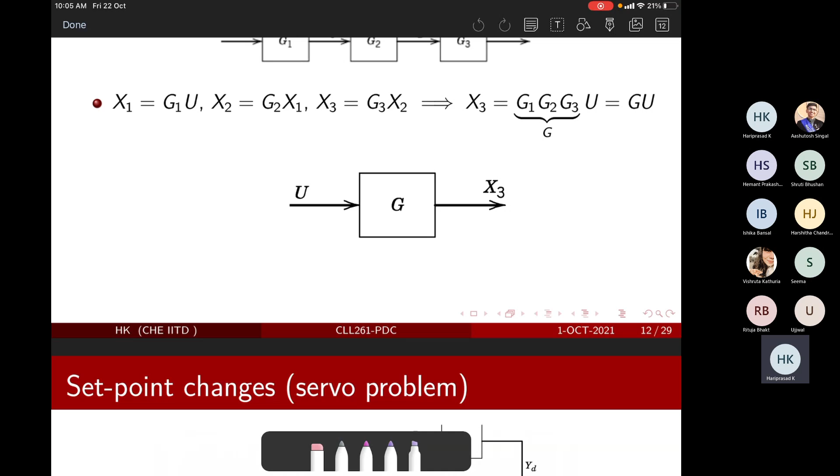Okay. Let me check. Okay.

Okay guys, let's restart or do a memorizing exercise. Where were you? Sorry, this is my kids' business. Let me close this down.

Okay, so we were trying to understand the closed loop control system with complete components, which means everything. So if you look at the architecture, it contains various components, starting from here. Give me a minute.

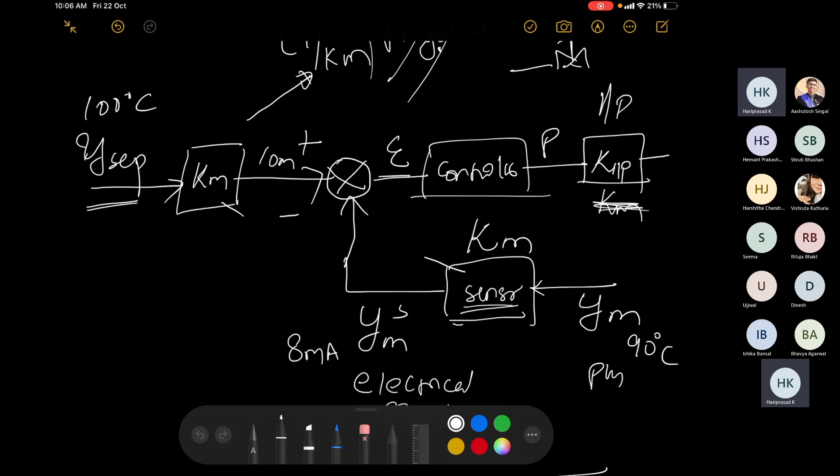So it starts with a set point. You have to have a conversion mechanism to take the set point inside. This is YSP, the original YSP. Then you need a converter, which is equivalent to mostly the measurement conversion.

So this would now go into YSP tilde, which is the set point in terms of signal. So this is the physical variable, and this is the signal equivalent. My goodness, this guy is making an issue.

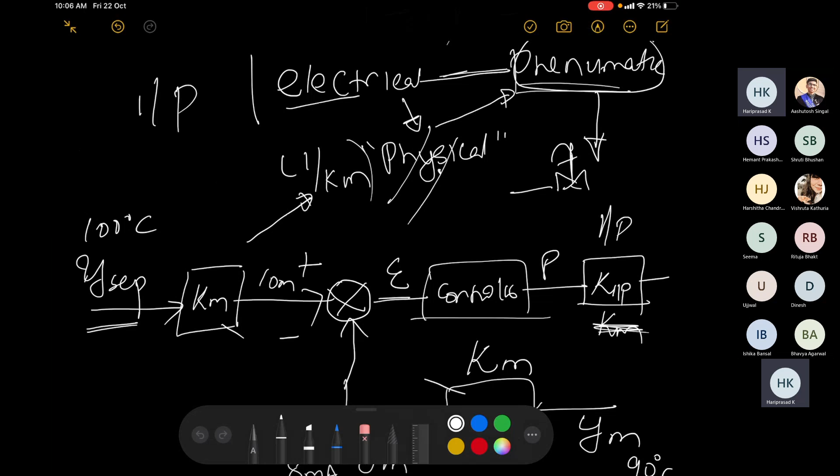So let me use this to explain that. This is the signal equivalent, and that is going to the comparator, where you get the measurements and calculate the error. That error, in terms of the signal, is going into the controller.

The controller would send it to I2P. From I2P, I think we have a very detailed comparison. I2P means I for current, P for pressure. So it's a current to pressure converter, or current to pressure transducer.

Then that is connected to the control valve, and the control valve connects back to the process. So this is the overall mechanism. Our concern was, we are basically looking for a process, and we know we need to control the process at a certain set point.

The key interest comes in the process term, and the controller term, because you have to control the process. The rest are added based on the needs, because the controller requires measurement, so you need to add a sensor. The controller will only take error in terms of signal, so you add a signal converter followed by a comparator. Then the real controller stays as it is.

Then the controller gives you an output, so you convert it back into a pneumatic variable, because your final change is affected through a control valve, or any actuator. So just for controlling the system, you have added up and bulked up the entire system in a slightly larger fashion.

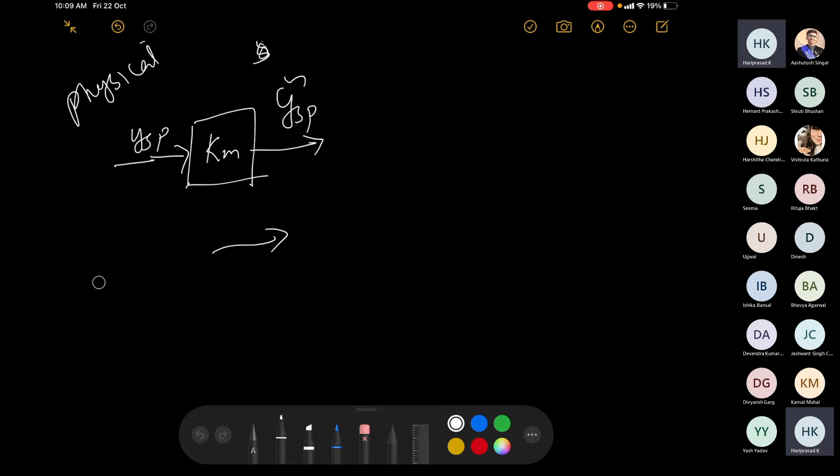So your aim is just to control, but you have added too many things. Our question is whether this added system is making the system worse. So your closed loop control system contains a lot of components, all interacting with each other. The point is whether such interaction matters, because we are not looking at them in isolation.

We are looking at the entire business, starting from the converter. This is the set point, this is YSP tilde, the comparator, the controller, maybe GC output, then you have GI to P, then GP, after which a disturbance comes in, which I'll write as GD, getting added here—this is your original output. And you have a measurement here, which is GM.

You can also write GM here for consistency, and this is coming back, this is plus, and this is minus. So many of the things you see here are slightly unwanted, but in terms of the general structure, for implementation purposes you have added so many things, because something needs something downstream, something needs something upstream.

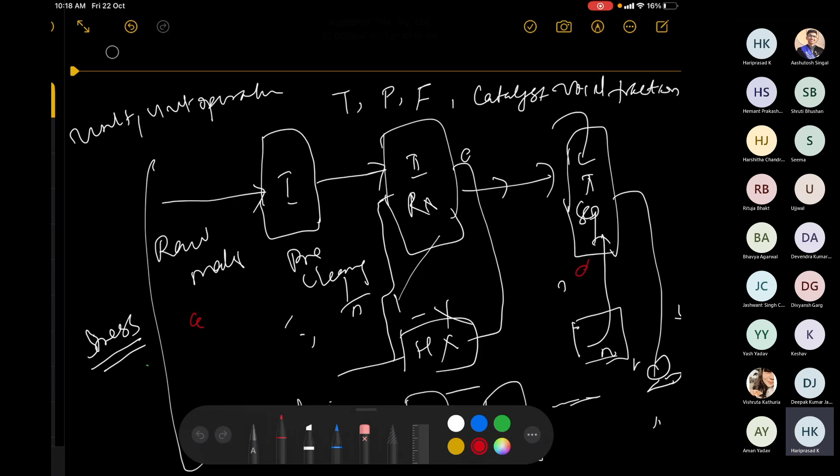So what we are going to do here is get the overall transfer function. If you look at the overall scheme, there are two problems that you are going to address. One is the issue that is due to the set point, one is the issue going to the disturbance. We know that the transfer function is linear in nature, so you could develop models corresponding to both of these and sum them up because they are additive in nature. This is adding over here, this is adding over here. So the overall transfer function of the system, which I will call GOL, is the summation of your trajectory tracking, or set point, and disturbance rejection. So G servo and G regulator.

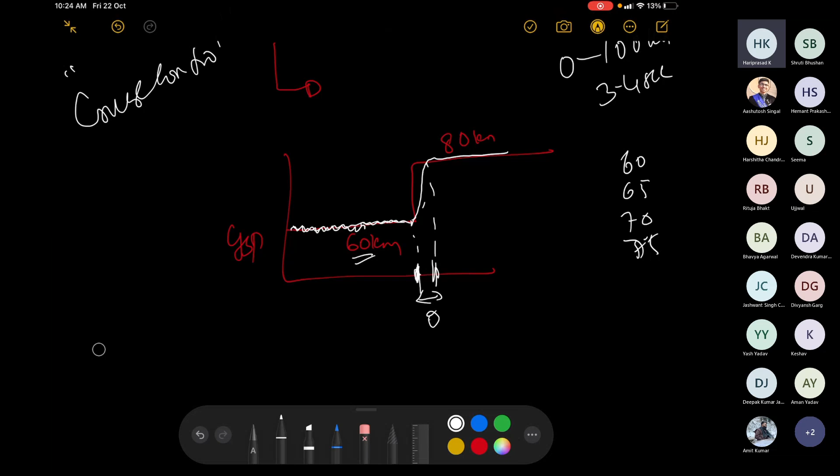This responsiveness, this is the response, may be faster in aerospace applications. So look at the applications of control systems. I would say aerospace would be the most responsive, because you have to invest in such minute hardware that affects things. Aerospace would be the fastest to respond because you cannot tolerate any single mistake, as it could be fatal. Then maybe automotive, and probably last would be chemical industry.

Why? Because in chemical processes you can tolerate some time; maybe even if it takes 10 seconds to reach, you might be able to tolerate it. But in applications like aerospace and automotive, this lead time should be very small. For instance, if you apply a brake, the vehicle should stop in 2 seconds.

So what is the control action? That is like a step-down operation. You are traveling at 60 kilometers, you wanted to bring it to 0, so you applied your brake. However fast the response is, it is not immediate; it will take 2 seconds to reach here.

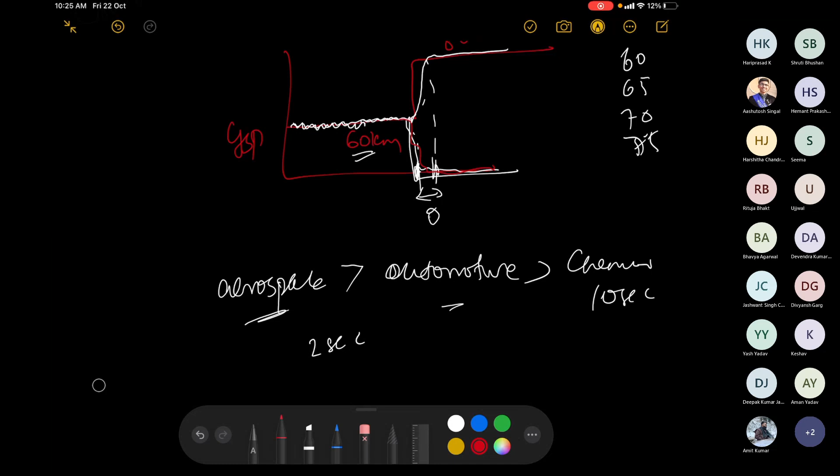This step up and step down in temperature happens because chemical processes are inherently slow in nature. If you start boiling water, switch it on and supply whatever level of heat, it takes around 2 to 3 minutes to boil the water, even more. Agreed or not agreed? Agreed, sir.

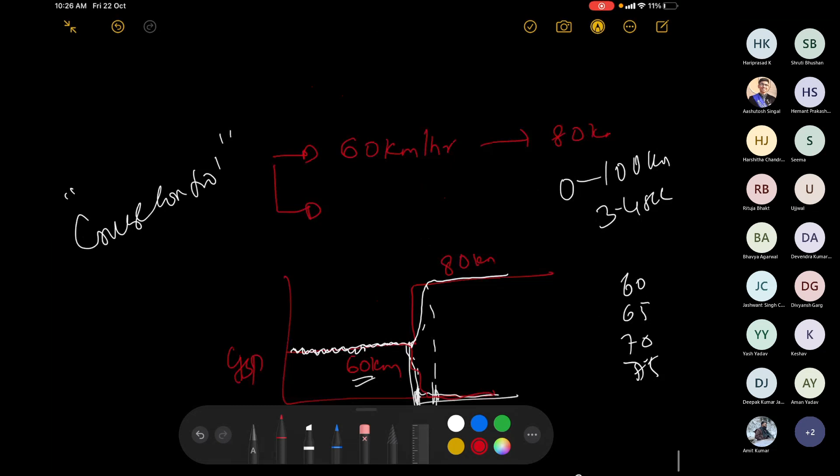Okay, so this is the philosophy. Any questions at the moment?

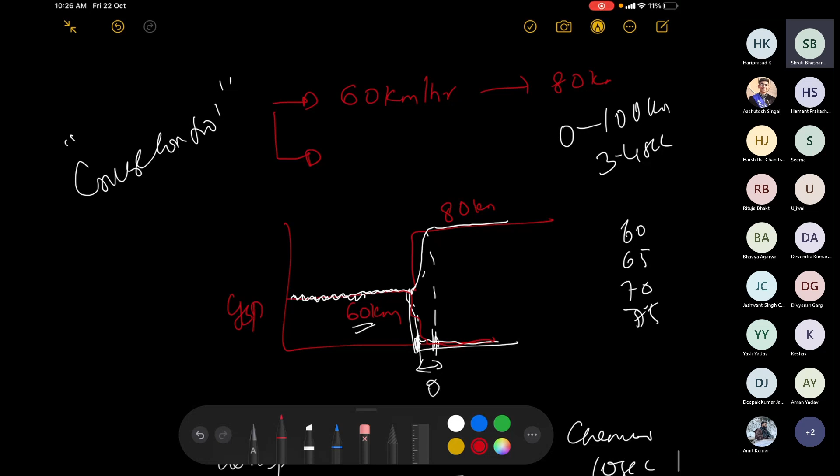Sir, that curve represents the time required for the change to occur from, say, 60 to 75. Yes, sir, this white curve, this one. Okay, yes, this is Y, SP versus time. Is that clarified? Yes, sir. Thank you, sir. Okay.

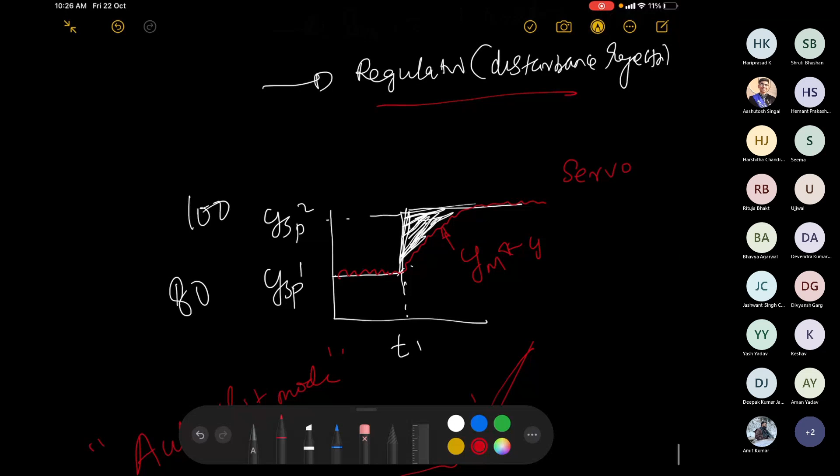So here also everything is versus time. T1, no? Here already I have time. So why time? We are dynamic systems, so you record everything with respect to some X versus T always. We are always talking about dynamic systems.

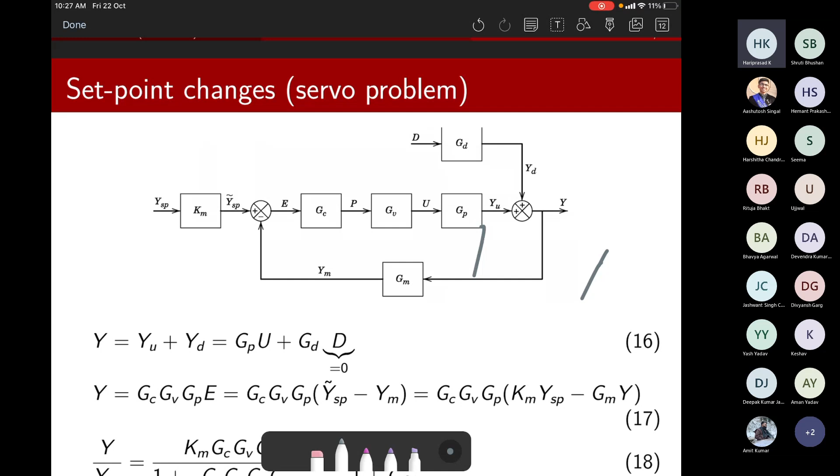Okay, so now coming to the point we were doing. We have looked at the set point, we have looked at the servo problem of... give me a minute.

Okay, so we have looked at the servo problem last time. For the servo problem, we will have to assume that only this guy is... okay.

Because you can sum up, you would take the first loop carefully, which is the set point thing. Then we will look at the second thing, where the set point will not be there. I am going to mark this with a purple or pink thing. This is the servo, sorry, the regulator loop, while this is the tracking loop.

Okay, so now the overall problem is the summation of the disturbance rejection plus regulation, sorry, the set point tracking. At the moment, we are not considering what is happening over here. So it is only GP times U as the output, because there is no YD here, so YU becomes Y.

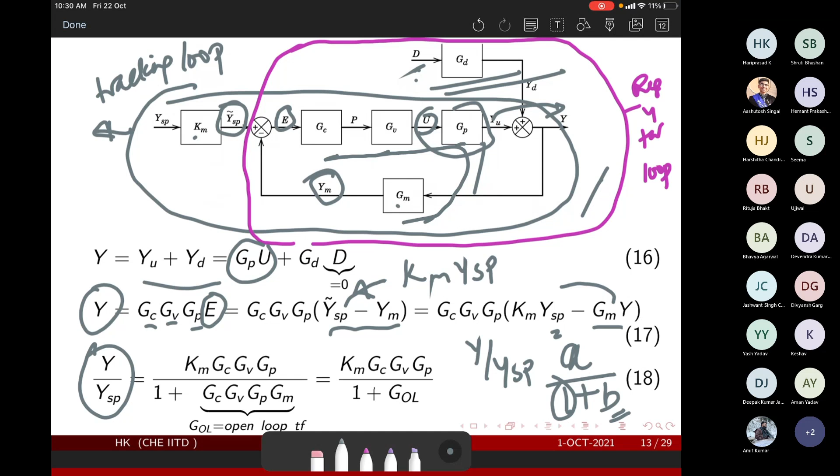So when you rearrange, you would see that it would be in the form of some A divided by 1 plus B. The 1 part would always be 1. This B part would be the product of the transfer functions, GC, GV, GP, GM, which is fully inside this loop. And the numerator would be the forward path, starting from KM, GC, GV, GP. So the transfer function would contain the forward element divided by 1 plus the product of elements in the loop. This is your loop.

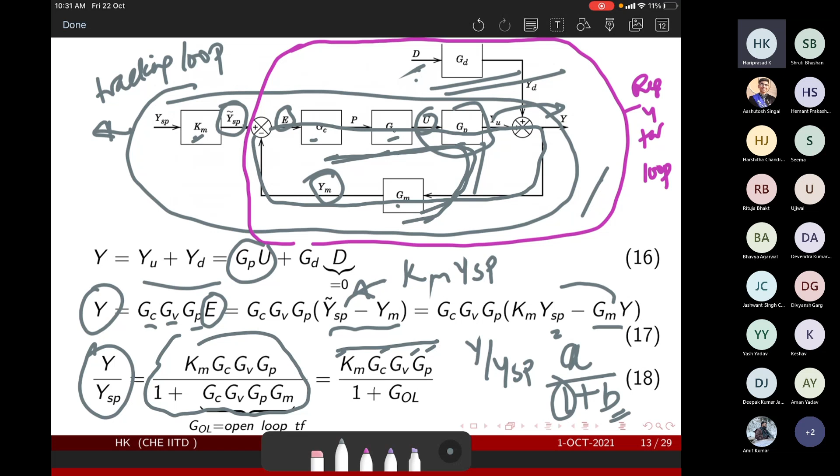This is not by chance, this is by virtue of the modularity of the system. You can check by yourself. I am not showing something from hand waving. This is not a hand wave argument.

So now coming to the disturbance case, which is the other case, we would happily keep this guy to be 0. So Y is equal to YU plus YD, and GP times U would be your YU, and D times GD would be your disturbance rejection. And of course, you will have to now expand. So GD D would stay as it is.

So what is YU? GP times U would be, U would stay here, so it would be GC GV GP, GC GV GP, and YSP tilde minus YM. YSP tilde is again KM times YSP, minus GM times Y. We will keep this guy to be 0 at the moment, because there is no set point change. We are only looking at the disturbance rejection.

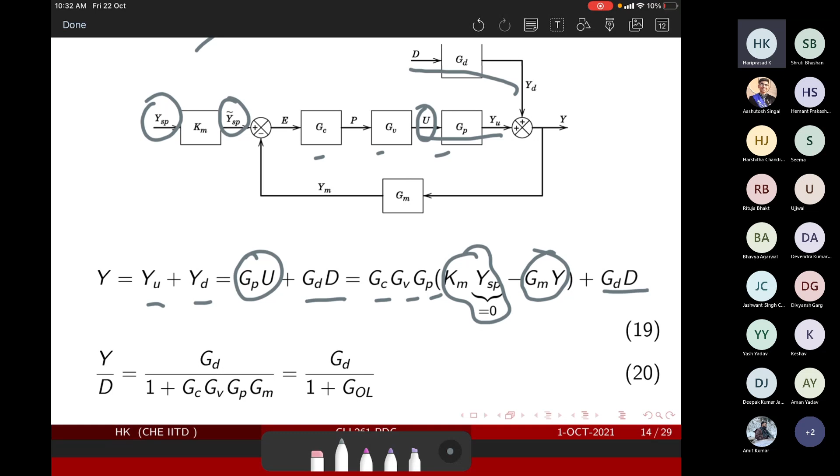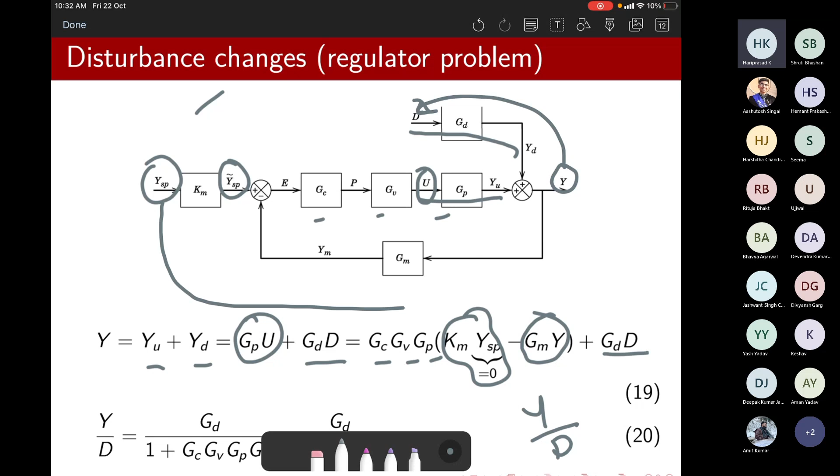So again now you do rearrangement. What you are really interested in is Y by D here. In the previous case, we were interested in Y by YSP. So look at the interesting variable Y by D, because we are looking at how disturbance is affecting the system. In the other case, we are looking at how set point change is affecting the system. So Y by D, if you look at it, you would see that magically you would get the same thing.

So the numerator, when you rearrange y, you see y by d, you would magically get y by d is equal to gd, which is the forward path here, because from gd to y it is only gd. So from d to y only gd comes in the forward path.

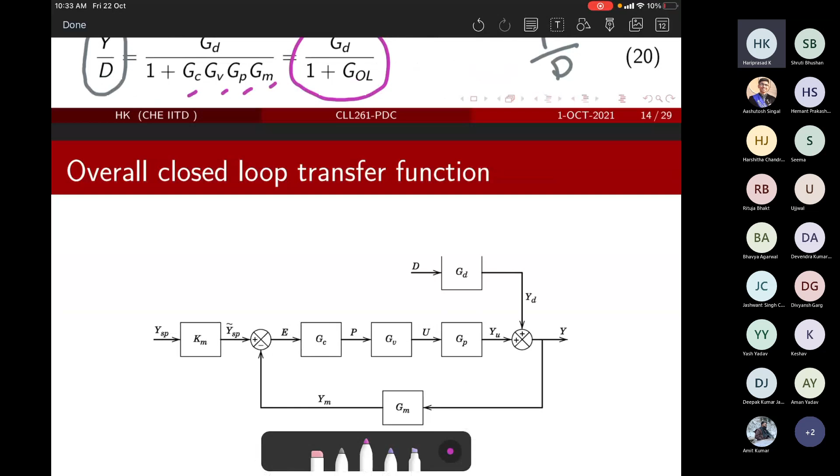And things within the loop are GC, GV, GP, GM. So 1 plus that. So the fundamental aspect when you look at the transfer function, you can see that it contains the regulator component

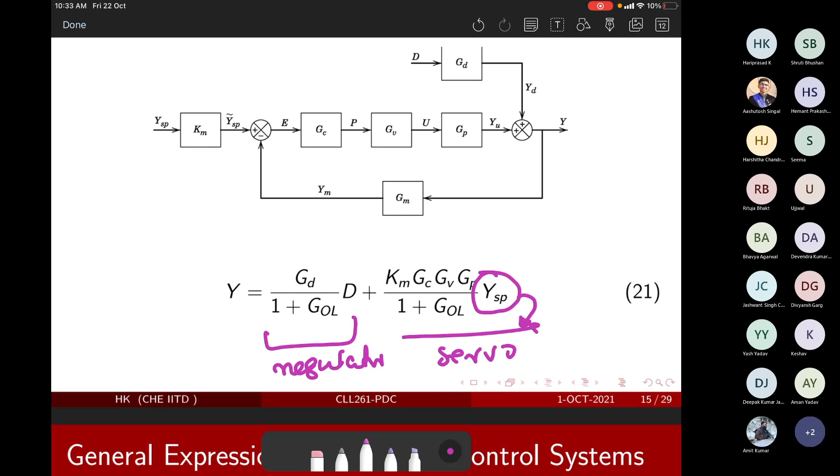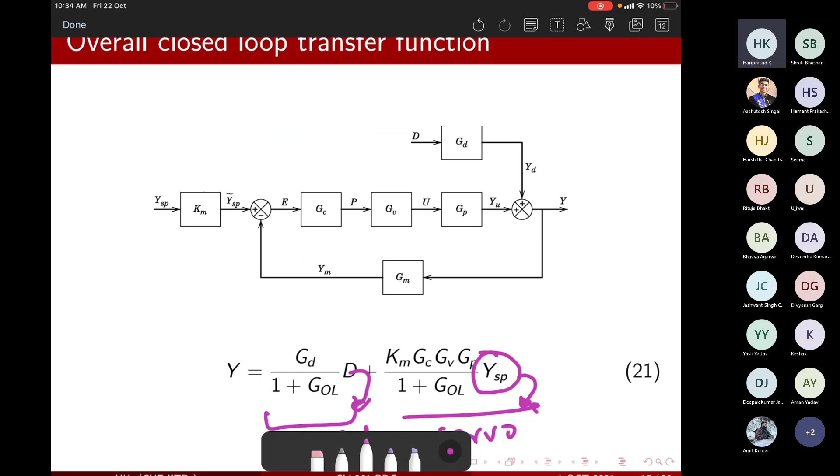and the servo component. How do you know that? You say that this is YSP here, so it is servo, and this is regulator. I have not done anything, I have just combined equation 20 and equation 18. So this is just a summation of 18 plus 20, straightforward summation, because they are additive.

So now the key takeaway here is that if you are looking from y to d, you have to look for what is in the forward path. The forward path is gd, that comes on top. Regardless of your process, the denominator is 1 plus the loop. 1 plus loop, what is there in the loop? gc, gv, gp, gm.

And look at the second component. What is there in the forward path? Km, gc, gv, gp. And regardless of anything, denominator would be 1 plus OL, so GOL means it is the loop transfer function, kept open, which would be GC, GV, GP, GM.

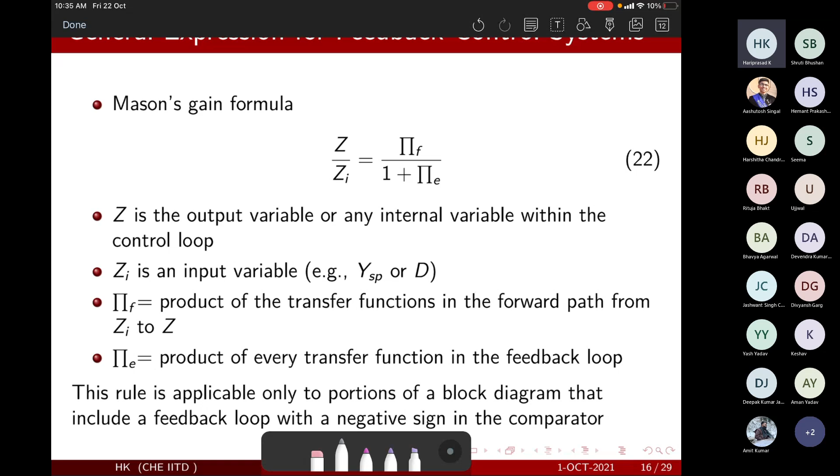So this celebrated result is interesting. This is known as Mason's gain formula. So if you have a loop and you need to calculate the transfer ratio of two transfer functions, for instance y by ysp or y by d, it is calculated as the product of the forward path divided by 1 plus the product of every transfer function in the loop.

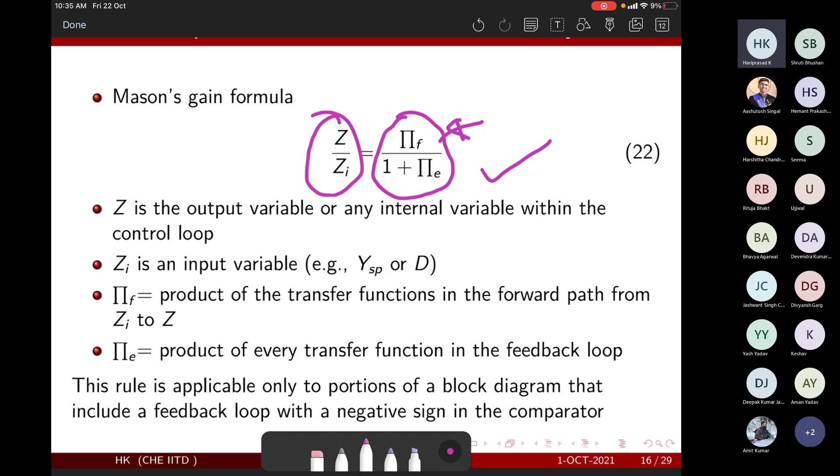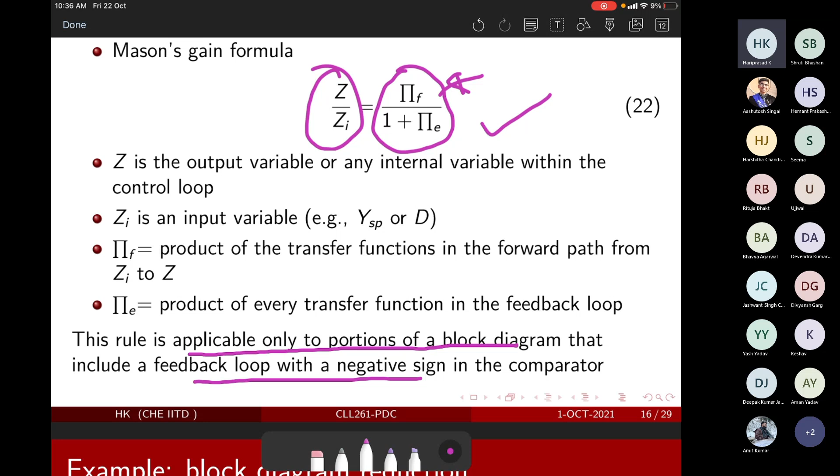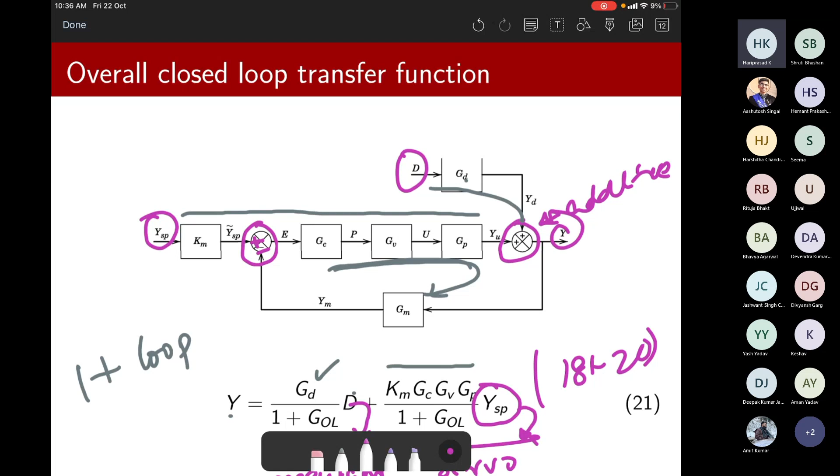The key point is that this seems very interesting, but the only problem is that this rule is applicable only when your feedback loop has a negative sign in the comparator. See, this is a negative sign, so one is positive and one is negative. This is only applicable when we have this positive and negative sign combination. You may see a particular case wherein both of these things are getting added up, so you will not be able to use this simplified formula as it is.

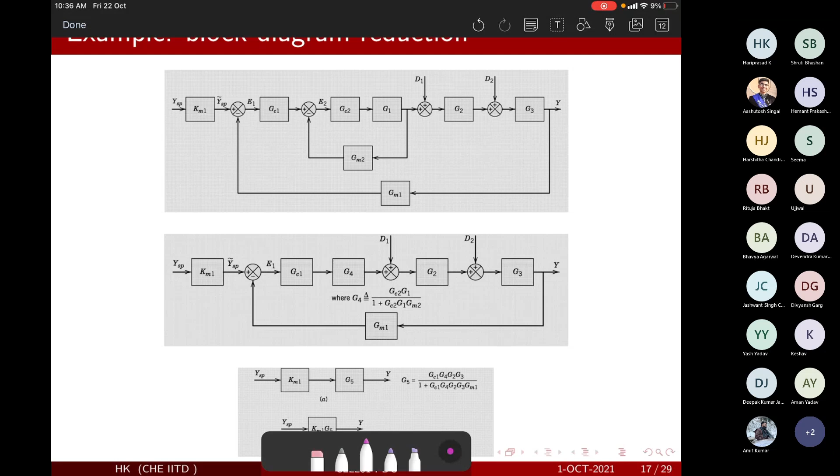So we'll just show an example, then I'll wait for questions. This is the overall transfer function. So how are we decomposing it? Go inside and try to make simplification. So this is a loop and it contains positive and negative also, so you can apply Mason's gain formula.

So what are we going to do now? We are going to replace the relation with E2 with this. How do we do it? Product of the forward transfer function, which is GC2 G1, divided by 1 plus product of all the transfer functions within the loop. So it is GC2 times G1 by 1 plus GC2 G1 GM2. Let me call it G4, so I replaced it here with G4. So this is simplified.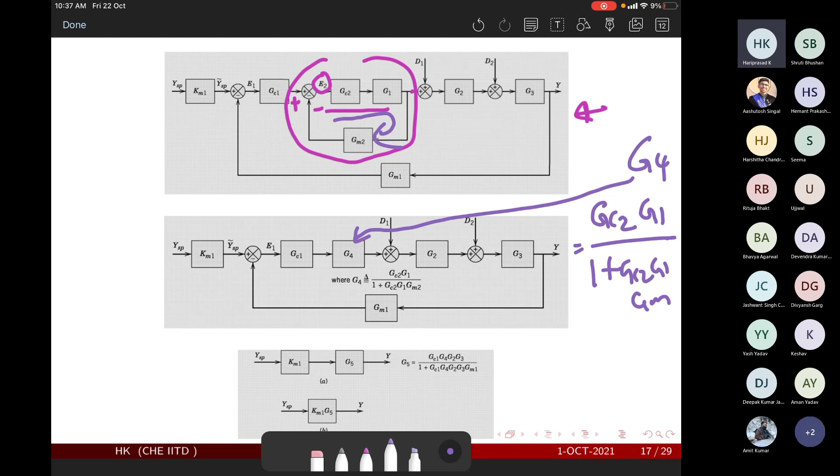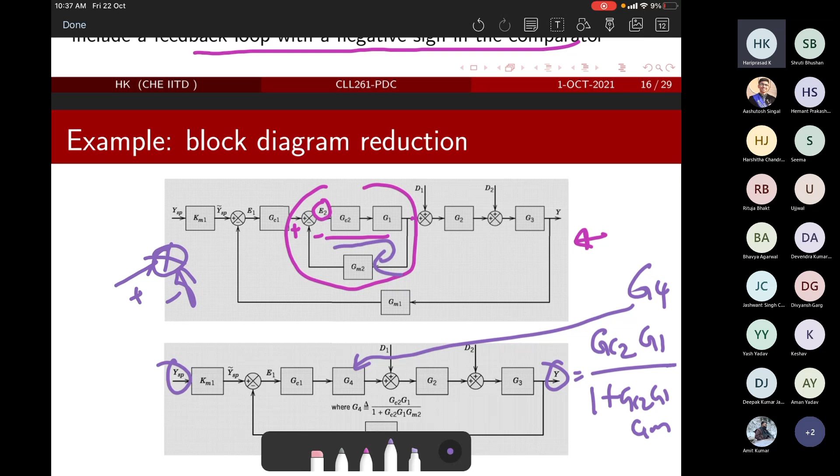Similar to that you can add up, and in that way we can keep compressing it, finally trying to relate between YSP and Y. But applying Mason's gain formula is fully contingent on the fact that your comparator contains a positive and a negative, otherwise you will have to manually derive it like we have done here.

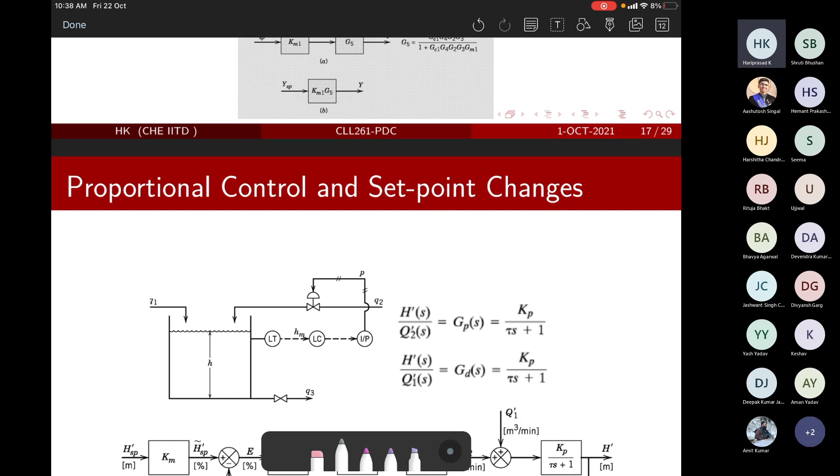Okay, before we go ahead, proportional control and set point change. We'll now look at another aspect: how the set point change and disturbance changes behave. We've looked at the general case, now we look at two special classes of controller, proportional and integral, which contain parameters Kc, and here Kc and tau. We are going to look at how the proportional controller and integral controller respond to servo and regulatory problems specifically, and that is the remaining maybe 6 to 7 slides we will cover.

Before we go ahead, I can wait for any questions. Anything that is unclear till now?

Is it all clear to all of you? Any doubt? No, sir, it's all right. Good, perfect. Okay, so now as I told, this is all general.

You see, your Gc is just Gc. So now let's give a parameterized form, which means let's look at the problem with a very specific eye. So Gc could be P or PI. You can also do the same analysis for PID, but it becomes a little more complex, though you can do it on your own. So this is basically the idea: it can be P, PI or PID, or anything.

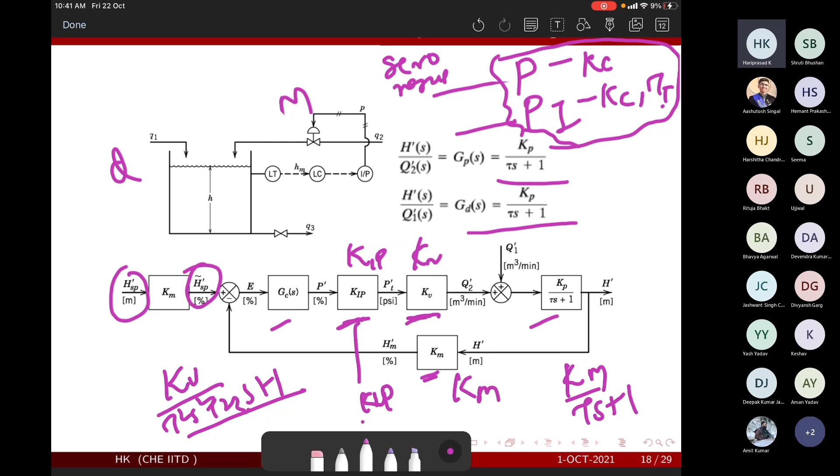And of course, in this problem we are taking it all this way for simplicity. But again, mind that if you have been given specific information, like your I/P dynamics are first order, it would be KIP by tau IP s plus 1. You have to use this information. At the moment we don't have to, so it is anyway for illustration purpose.

So, okay, we are assuming proportional control, so your Gc becomes Kc alone because there is no integral component, nothing. So Kc, Kp, Kc, Kip, Kv, and Kp by tau s plus 1. This Km is coming from here, so please note it is not written according to the sequence. And the denominator would contain 1 plus all these guys: Gc, Kip, Kv, Kp by tau s plus 1 and Km. 1 plus all these terms.

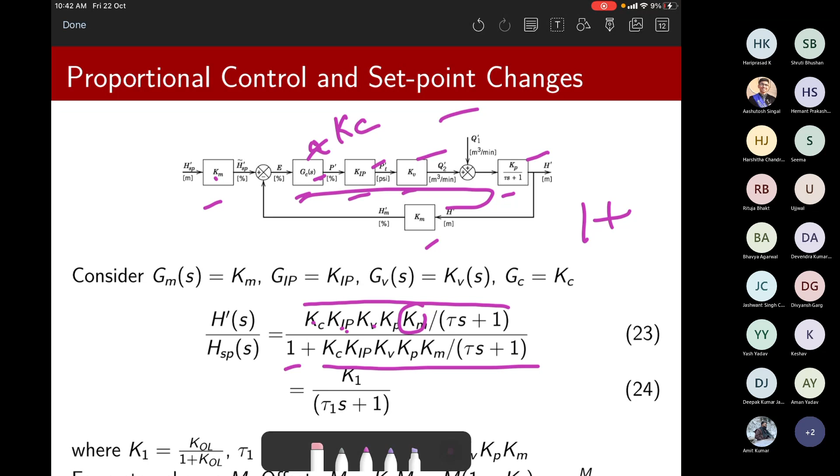So now what I am trying to say is, consider this as an exercise, you can just check. This could also be written as a general constant k1 by tau1 s plus 1. So you see that your tau is different and your k is also different. So your k1 will become this particular form.

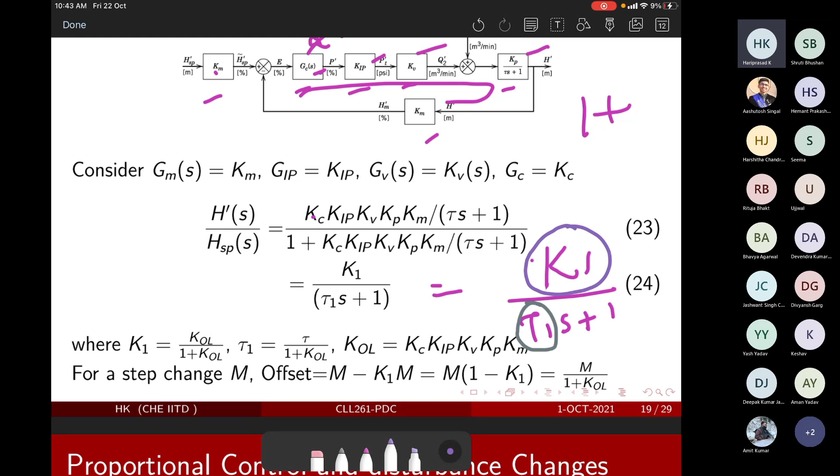KOL by 1 plus KOL, but KOL is the product of all these terms, and tau1 is tau by 1 plus KOL. Do it at your leisure, you will be able to get it. So the point I am trying to say is this would be another overall dynamics of first order, with this constant having a different meaning, which is the product of some other terms.

So what we are going to do here is look for a set point change. So for the set point change, what we will do is, previously at t equal to 0, you have effected a set point change over m. So this is 0 and this is m.

And we are going to calculate this offset, if there is any offset or what. So this is your original variable, which is ym, and this m, you need to track m. So any error from m to this ym is your offset. So m is the required value that you have to reach.

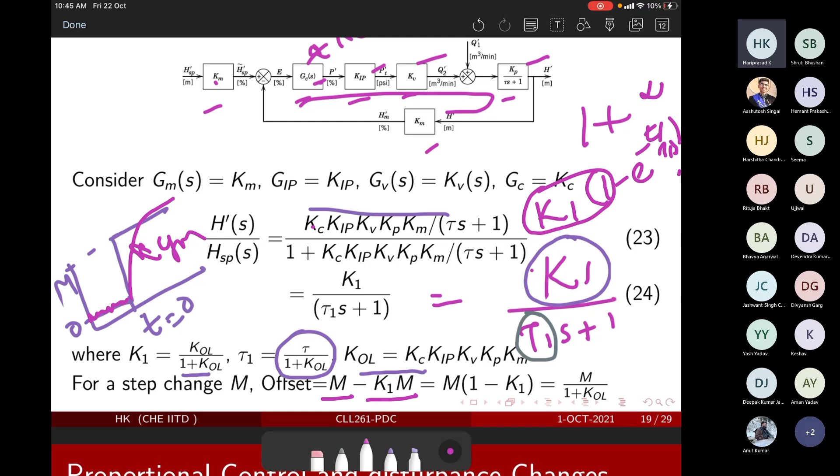So when t becomes infinity, your final values. I hope you are understanding what I'm trying to say. Let me write it again.

So at t is equal to, this is the set point YSP, and you have hiked it to m 0, whatever. This was your m. So the error, the final error that you would like to get would be m minus, and this is your output, whatever it may be, let me draw a green line as your output, and it might go like this. I'm confidently saying it will not reach.

Why? Because your proportional control is known for offset. So why is it known with offset? So you have seen y by ysp is k1 by tau1 s plus 1, or whatsoever be this new k1 and tau.

So when you integrate, y of t would be, let's say if you do a step change of m, what you are going to get would be m times k1 times 1 minus e raised to minus t by tau1. So when t tends to infinity, this term would go.

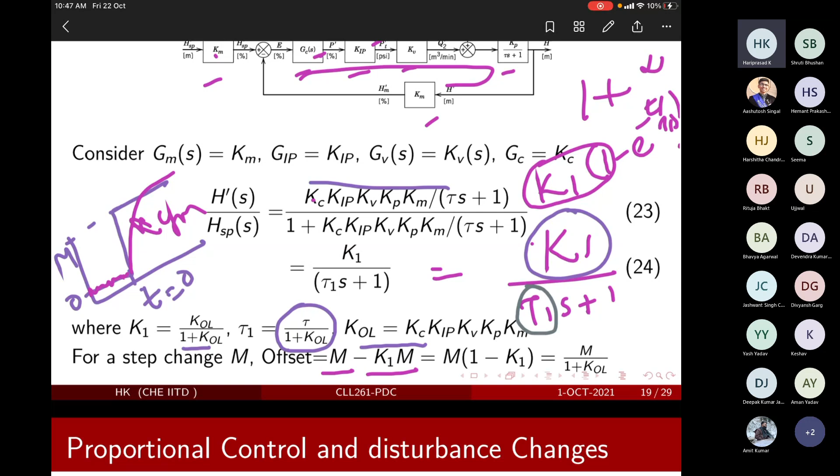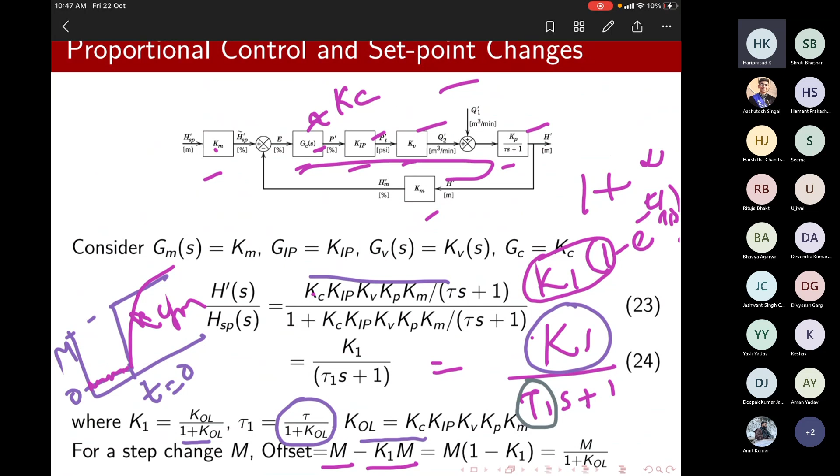So now look at, eventually what are we saying? If you have a proportional controller, if you do a set point change, you won't reach m, but you will only reach m into 1 minus k1. So there is an offset.

So let's look at the disturbance rejection problem. Then we will have the forward path would be kp by tau s plus 1. Of course, the denominator path would be the same thing, 1 plus kc kip kv tau s plus 1. This whole thing, which we have written as 1 plus KOL by tau s plus 1. So this you would eventually take up in a new form K2, by multiplying all constants, K2 by tau1 s plus 1.

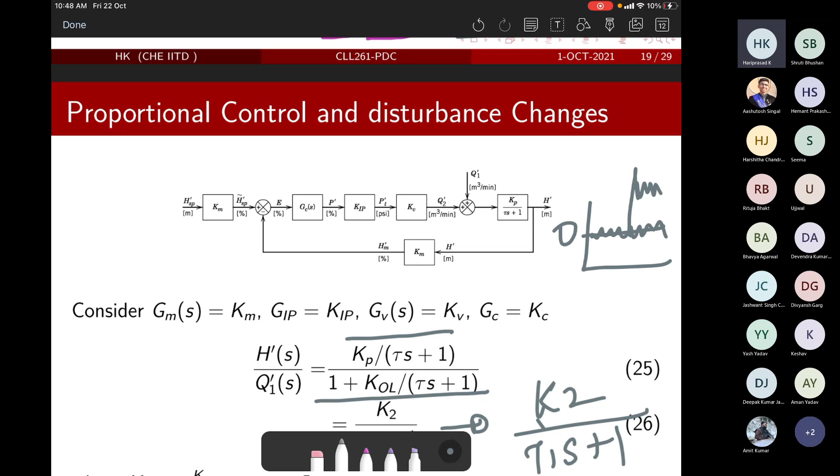So here also what you would really see, it's a regulator problem, a disturbance rejection problem. So you don't have any set point. You have to maintain the desired trajectory. You don't have to change it, but some disturbance happens and finally it moved away. So you have to calculate the offset as the difference between K2m minus, rather 0 minus K2m.

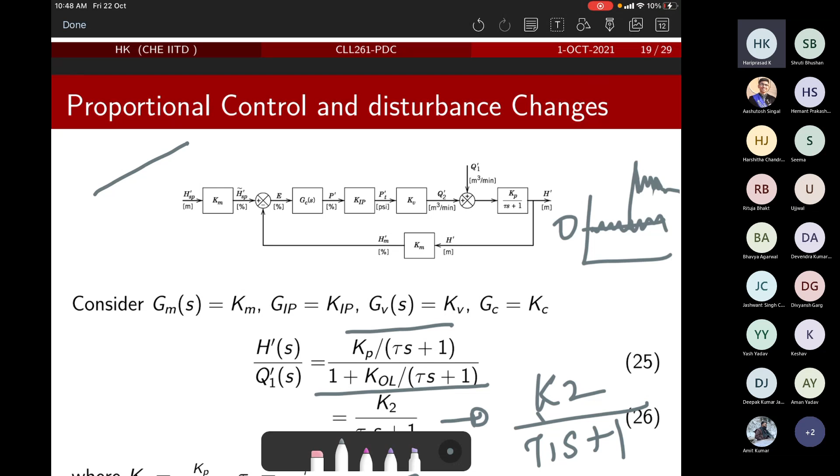So again what you are going to get, the take home message is that if you had a proportional control to control the disturbance rejection in a closed loop system, you would be having an offset of 0 minus K2m, where m is the set point value, K2 is the simplified transfer function in the numerator.

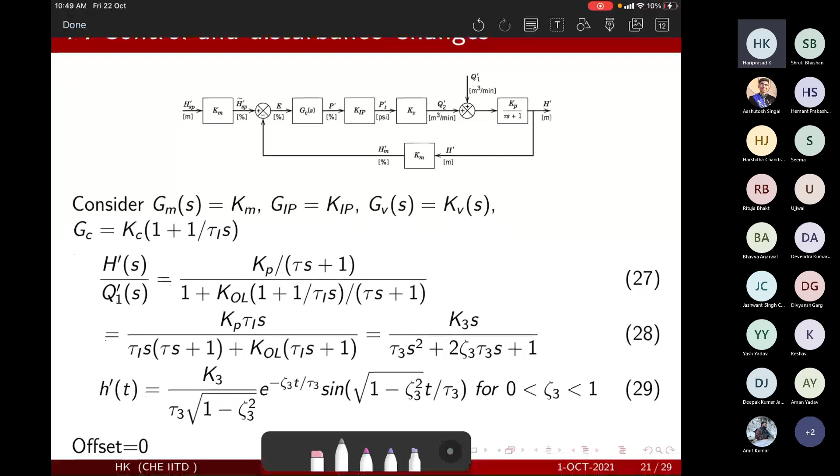So now look, what if it becomes a PI controller? We are only looking at the disturbance rejection for the PI control, just to get a feel for how it is going to be different. The difference is that your GC now becomes KC times 1 plus tau I, 1 by tau I s. So when you substitute it and do the manipulation, and calculate whatever integration, you would see the following.

So forget about that, you can try the steps. The integration would give you a complex expression having an exponential of zeta times t and so on. So what would happen when t tends to infinity? You substitute t, this whole exponential term will evaluate to 0, which essentially means the whole thing would evaluate to 0.

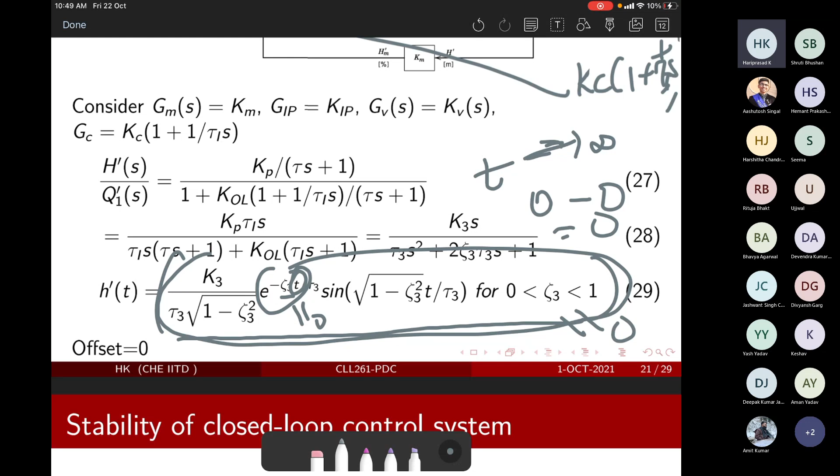So what would be the offset in this case? 0 minus the response, which would give you 0. So the take-home message: if you add an integral component, the PI control, due to this additional integral component, the overall system offset has been removed.

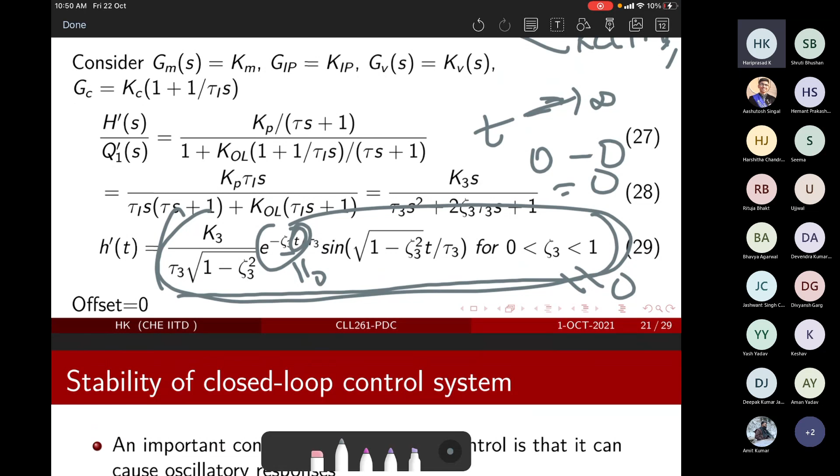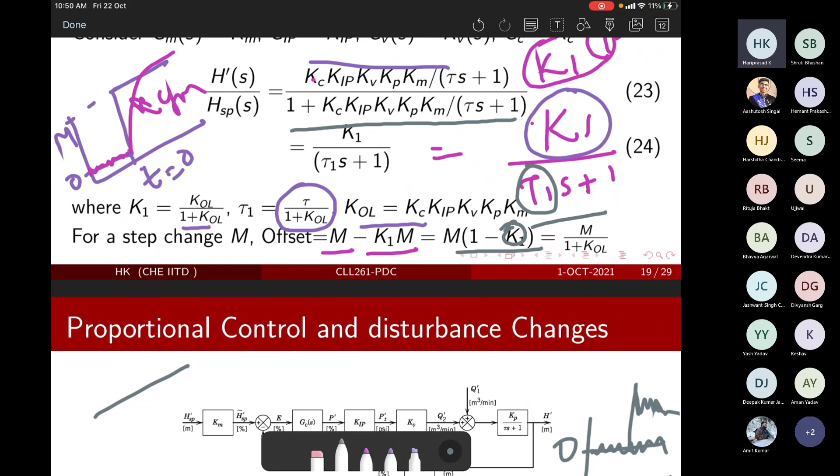So this is also true when you do tracking, which you can independently check. I hope in the textbook they have shown an example. So here instead of m minus k1 m, you would see m into 1 minus 0, which essentially means eventually you will be able to reach the set point m. So if you add an integral control, in addition to the proportional, you would see there is 100% offset elimination. This is the take-home message I wanted to say here, and I can wait a couple of minutes if you have any clarification.

Any clarification at the moment?

So this is absolutely similar analysis. You have to calculate some transfer function h by q1, which is the transfer function of the set point or even the disturbance. Then you have to do the inverse. We have been doing this from the first chapter onwards. But your transfer function here is the fully closed loop transfer function, so you will have to take all the factors and join them together. That is the only additional thing you're doing here.

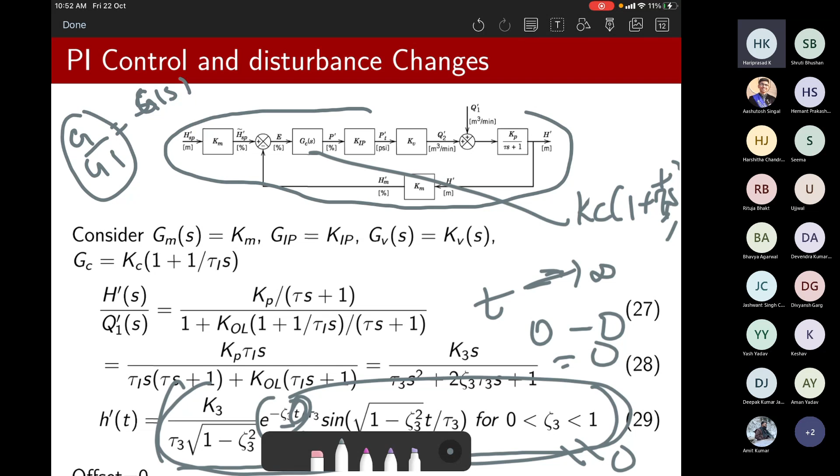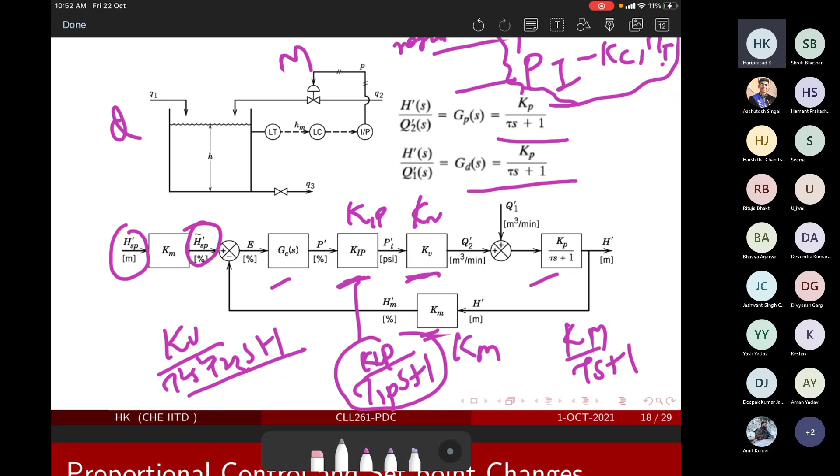Rest all you have already learned, so we are now imparting that knowledge on the closed loop transfer function, if you want to pedagogically think about what we are doing. We are not learning anything new in terms of the responses or action, but we are only learning new in terms of how to reduce this complex loop transfer function to a simplified transfer function. All you have learned pedagogically is just being imparted onto this. Any doubt at the moment?

Is that all clear? May I go ahead? Yes sir, I hope. Shruti, do you want to say something or is it all fine? Sir, I said it's clear.

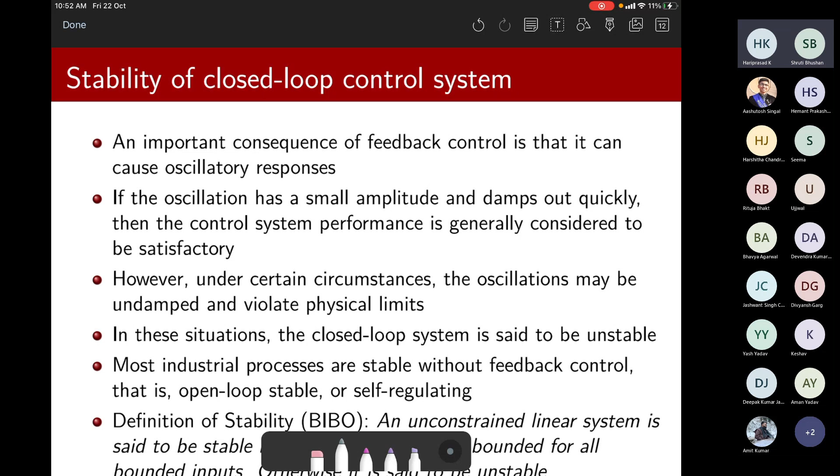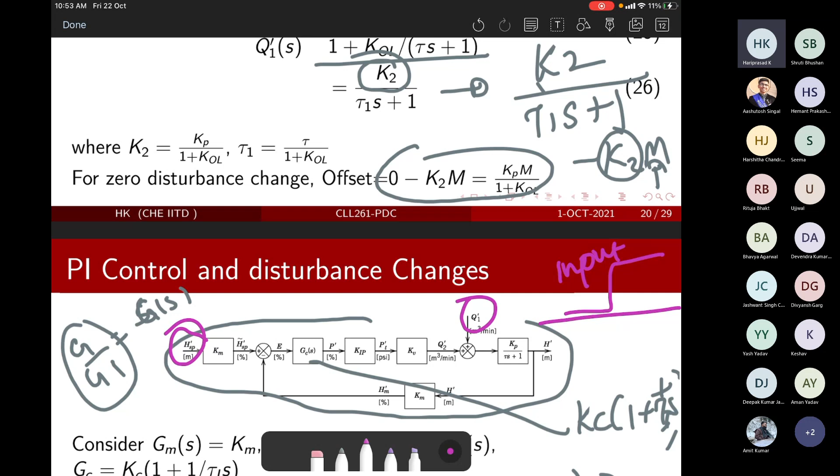Okay, so now of course, till now what we have learned is kind of imparting something on top. So what we are going to learn is slightly new, but you have learned some part of it. We have now looked at the responses. We can also look at stability, in the sense that if you have made this complex control system and you have put a step change into the set point or the disturbance wherever, now we need to look at whether your system is stable. So how do you evaluate that your system is stable? There are various definitions of stability.

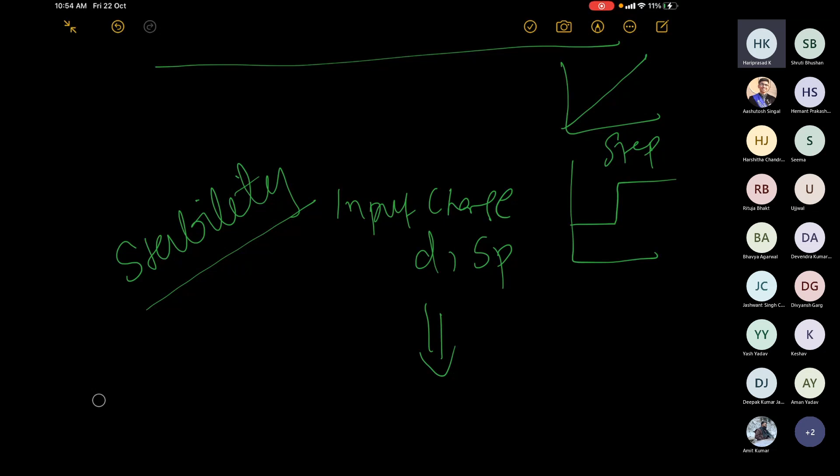So there are various definitions of stability. You look at the premise: okay, you did an input change. For instance, it was normal, you stepped up. This is one input change, like a step input change. It can be at the disturbance side or the set point side, wherever. Or you might do a ramp change, or something else. So the simplest definition of stability, as I told you there are various definitions of stability—somebody who is interested, I don't know if you've taken a real analysis class in mathematics, you would be surprised to see there are around 20 to 25 definitions of stability. So we don't go into all that.

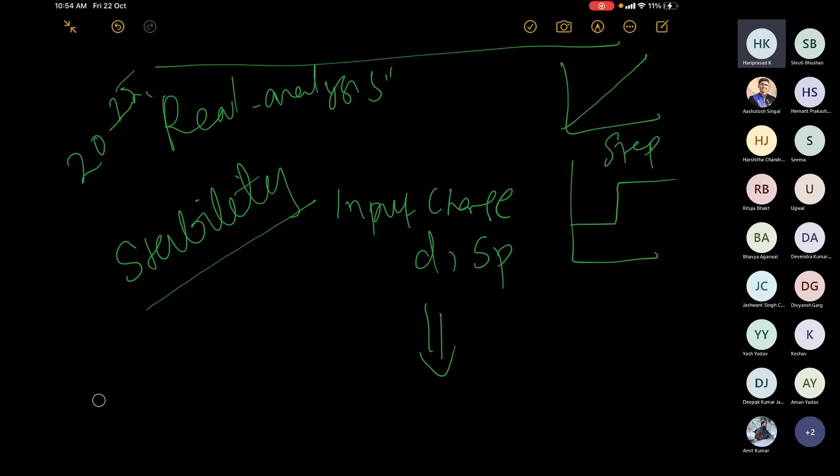So we will look at the simplest form of stability. What is the simplest form of stability? You have injected, okay, this is your loop, so you have various components. I'm not marking though, oh I'm sorry.

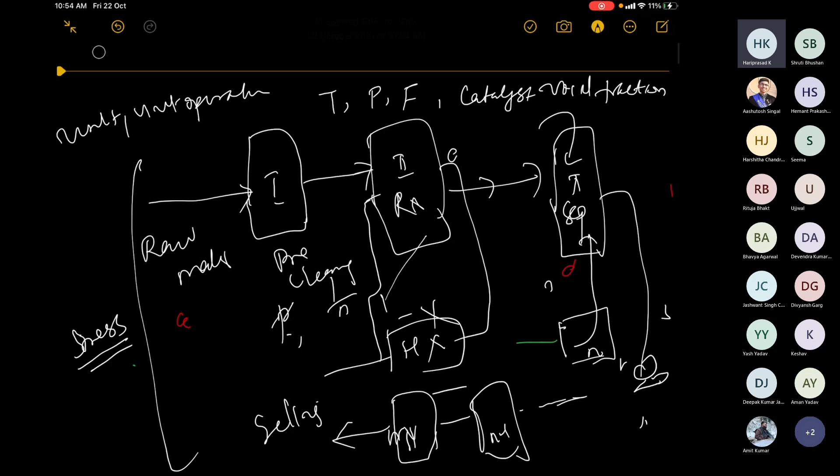Sometimes it's annoying though. Wait.

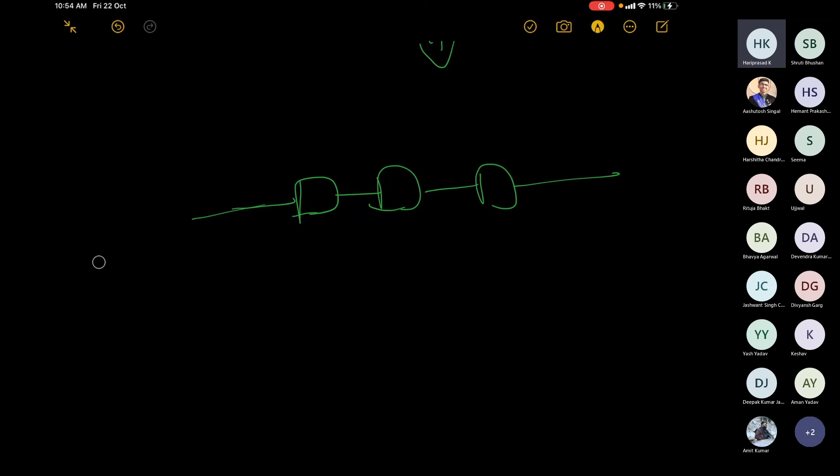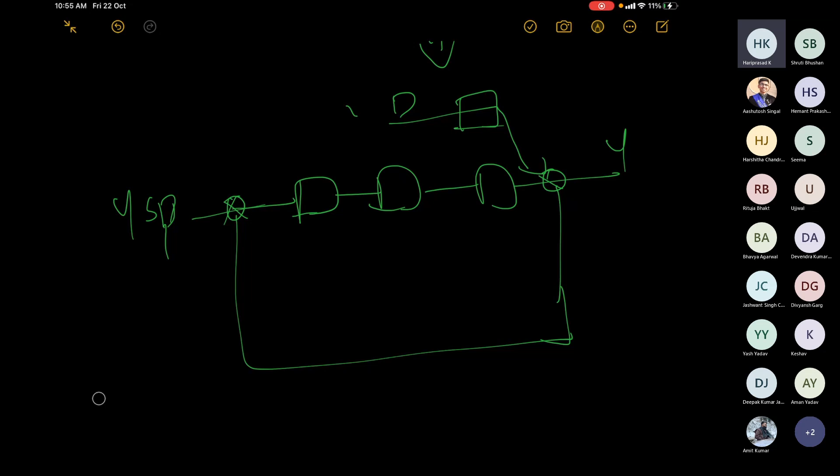So this is your loop and this is your output. Maybe I can put a D also here. This is your D, you have a transfer function, this is your Y, and this is your comparator, this is your YSP. So the simplest form, you are either introducing some change here or in the disturbance side.

The simplest form of stability, what we can say, is by observing Y. You put a binocular or whatever, put a sensor and start looking at Y. The simplest definition says it is bounded input, bounded output, which essentially means that if you send an input which is bounded, your output should also be bounded.

It is a very fair definition. So you are doing a change which is bounded. Mind that the ramp is not bounded - it can go up till infinity, unless you clip it at some point. But step is bounded because it has a boundary. Sinusoidal is also bounded because there is a boundary. Ramp, as I told you, is not bounded unless you clip at some point.

So the BIBO stability, or bounded input bounded output stability, is a fair definition. You do a change which is bounded, which essentially means you made a set point change from 1 to 2 - very bounded. You're not changing from 1 to infinity, because that would be an unbounded change in the input, and then you would be prone to get an output that is unbounded.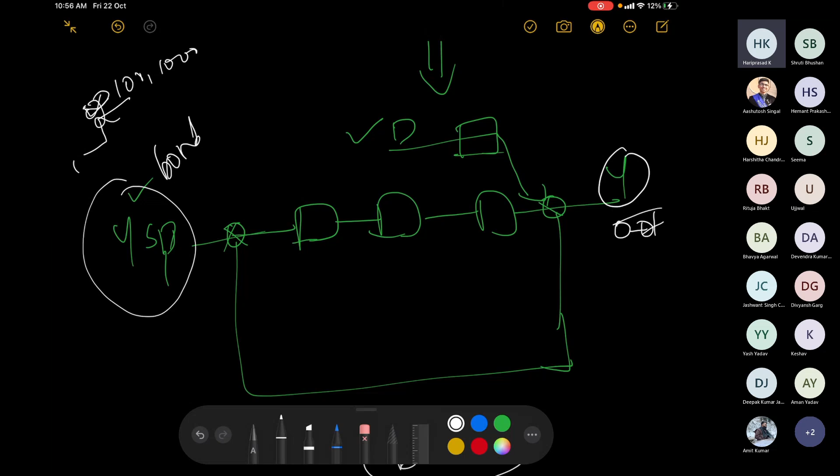But if you make a bounded change, 1 to maybe 100, maybe 1000, all bounded - if your input is bounded, essentially your output should also be bounded. Or if your output is bounded, essentially your input is also bounded. So this is one of the definitions of stability. As I told, there are 20 to 25 definitions of various specific aspects of stability. This is called bounded input, bounded output stability.

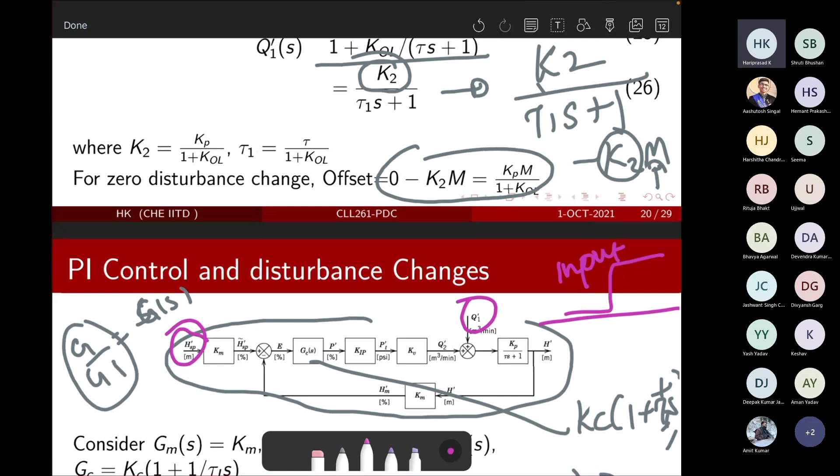Okay, I think I have 2 minutes. I will just show something which you can look at in detail in the tutorial class - how to check the bounded input, bounded output stability. I think I will take 3-4 minutes. Please bear with me so we'll be able to take that up in the next tutorial, otherwise we may not be able to. Just give me a minute.

So it can be displayed. Quite interesting. There was a problem in opening. Okay. I think probably my device doesn't want me to teach that, but I can tell you the thing.